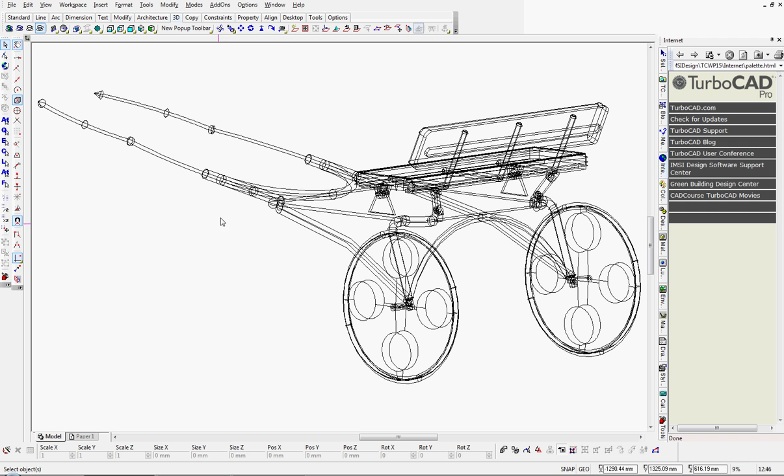We're in Turbocad Professional V15.2, looking at a little racing sulky I designed. The chassis parts are made by sending a profile along a path—in this case just an ordinary circle along a path line I've defined. Let's have a look in hidden line mode.

Today I just wanted to cover a bit about properties and the different looks. I think we'll pop her into a render and see what we've got.

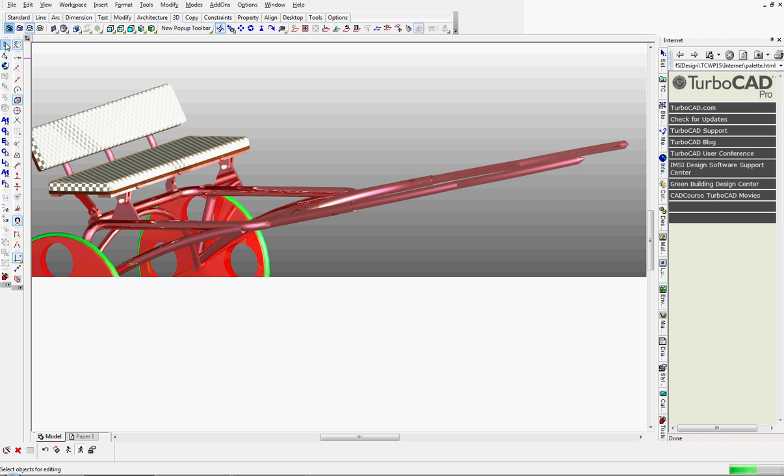I rather like these green rims. It's made out of a torus, that's the tyre, so I'm just going to have a look at its properties under the 3D tab. It's a green plastics—let's see what else we've got down here.

Plain red's no good on the red wheels and red frames. I'm just going to show you an example—white wall tyres are big in America, so we can just change its properties at a glance.

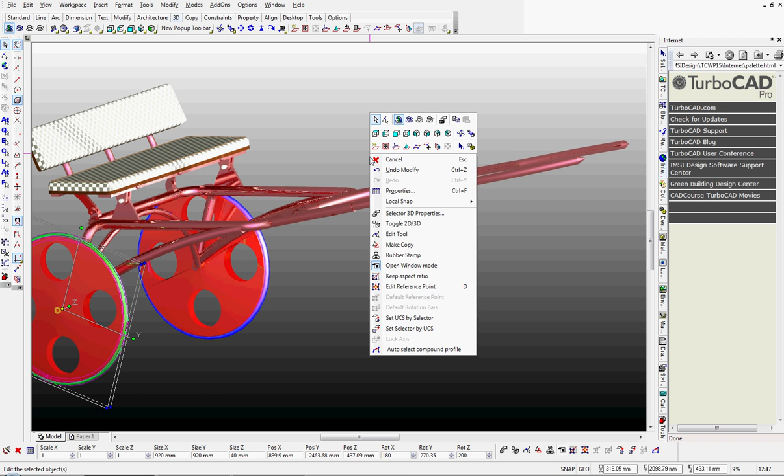A massive amount of options in Turbocad's properties, and I think I like that blue. Another torus—under the properties 3D tab: plastics green, plain red, plain blue.

So there we are, on blue rims. The backboard—that isn't the board, that's the frame that's holding it.

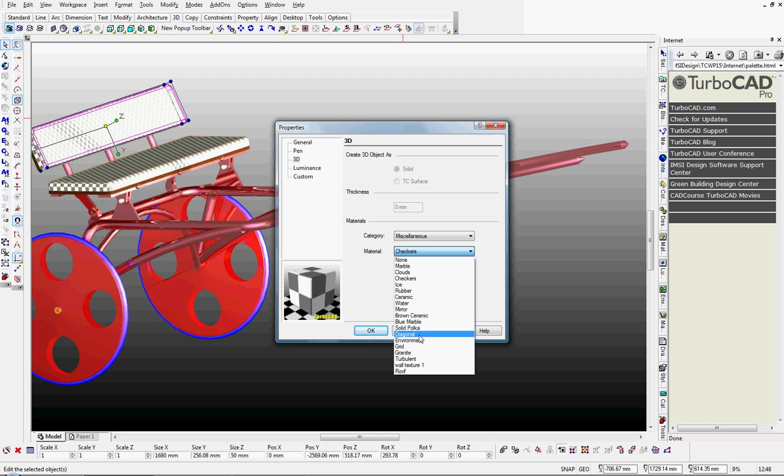Not sure what will happen here because all these corners have been filleted, so: checkers, ceramic, brown ceramic, blue marble, solid polka.

Well, undo that, I don't like the look of that. Let me just pop into the standard toolbar and zoom in on the corner so I can show you what I'm talking about.

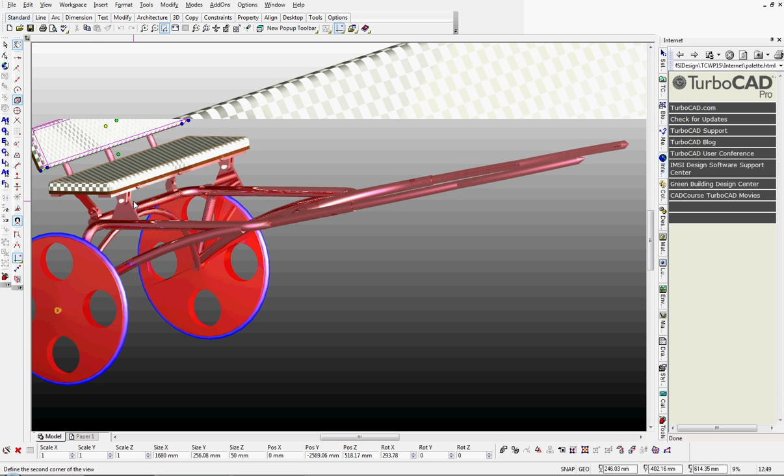Whereas normally the edge would be square, 90 degrees, I've chamfered all these off to give a textile appearance, and sometimes properties can't deal with that because the drawing's been altered so radically—we're at cosmetic stage now. Pop back out.

Something I don't think I've covered much is the open window mode, where we drag this box. It's now selected the two front yokes there, so we just pop into 3D, paint band, red paint.

As I've said before, I'm the world's worst for doing my paints and not saving them. That's an orange, and I'm going to pop a yellow on that.

It probably didn't have hold of that little cone there, so it didn't alter its properties. Back into 3D, paint band, red paint.

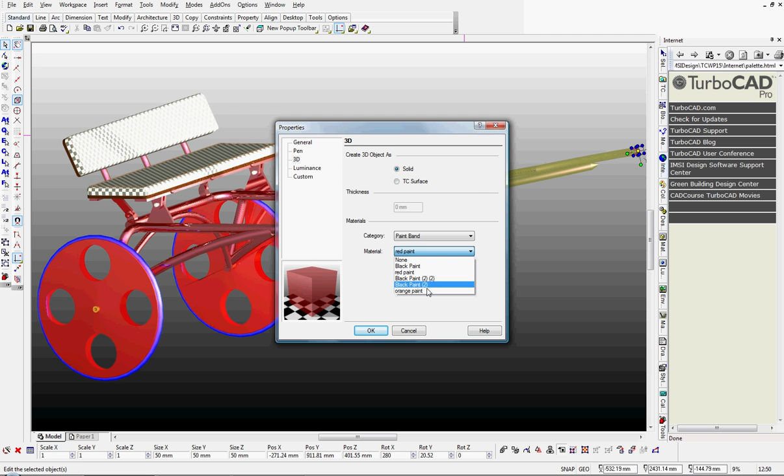Obviously I was using the orange—very bad housekeeping habits of mine. And we see the frames now partially yellow.

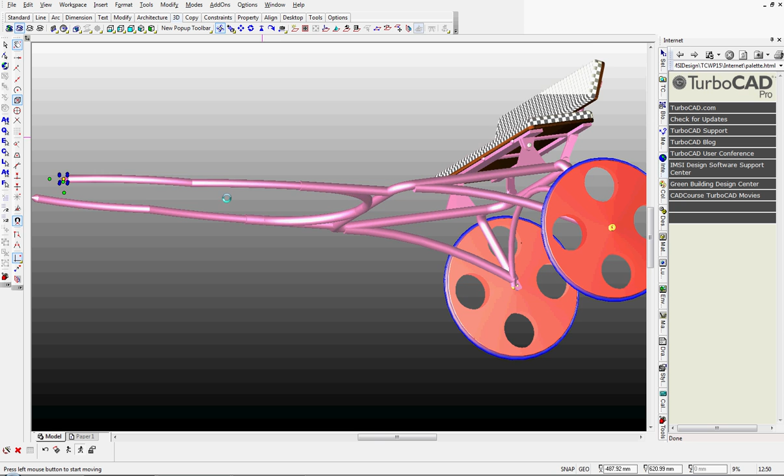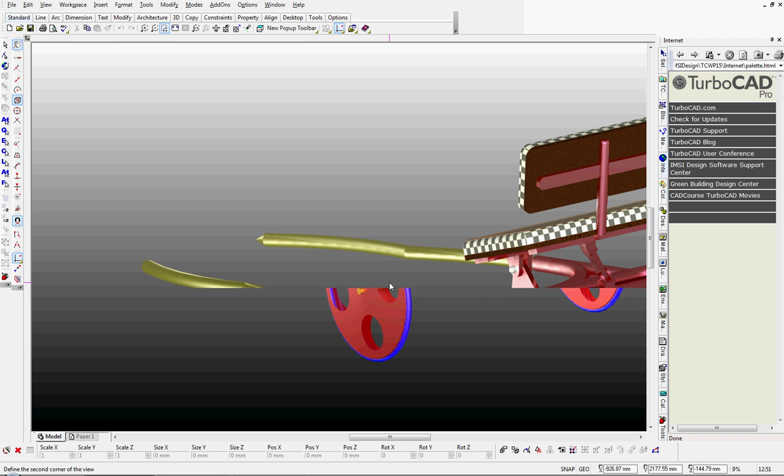I'm just going to grab hold of that, look to the drawing centre here, and go on the standard toolbar so we can see. Not sure what the overall effect of a gold frame would do.

A quick reverse method: undo, modify, undo, modify, undo, modify—and there's our red frame back up. Just pop it into isometric mode.

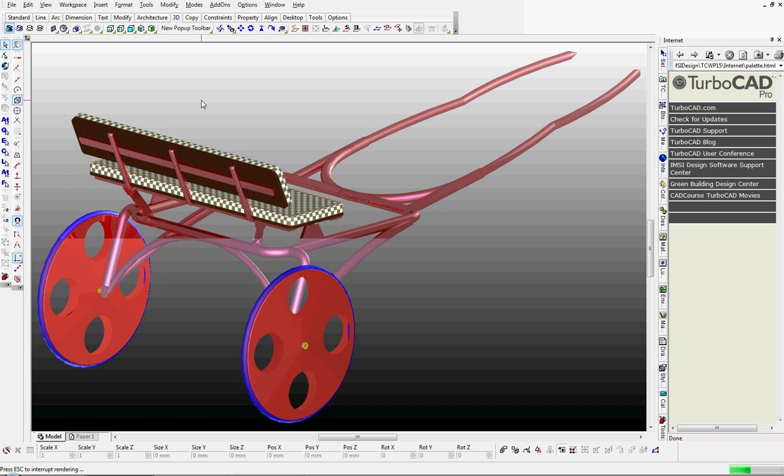A few different views, and it's full photorealistic rendering going on now. Not much else I can show you with that.

We've got one green and one blue—that's because I went back too far undoing.

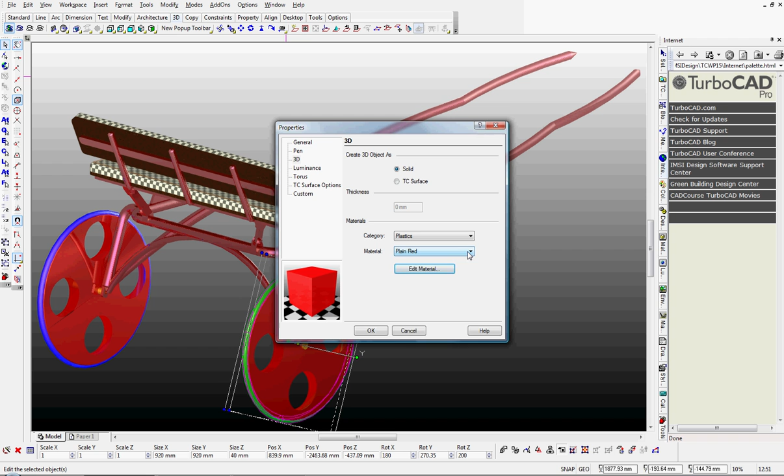Plain red—just cancel that. Plain blue, okay. That's because when I was undoing I went one step too far back.

And some various views, so you can see you can alter the properties to virtually anything you want.

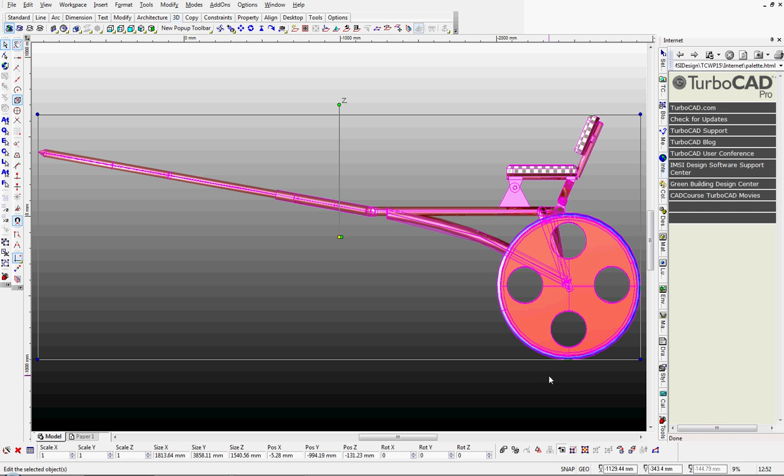There's plastics—this is a checker, like a checker pattern—and we could just open window the whole thing. That will select every part in the drawing, making it all one colour, for instance.

I wondered if—the only thing I hadn't done on this drawing was put some footrests in, until I got some measurements off the jockey.

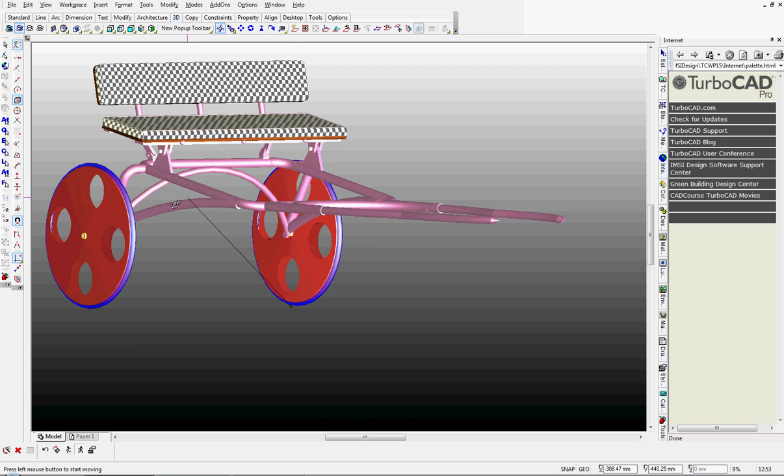So there you have it, properties—virtually any property you want.

I'm just going to pop into properties again, and if I drop this drop-down menu now, you'll see virtually bricks, circuit boards, decoration, eco-friendly, glass, knits, lacquer, leather, metals.

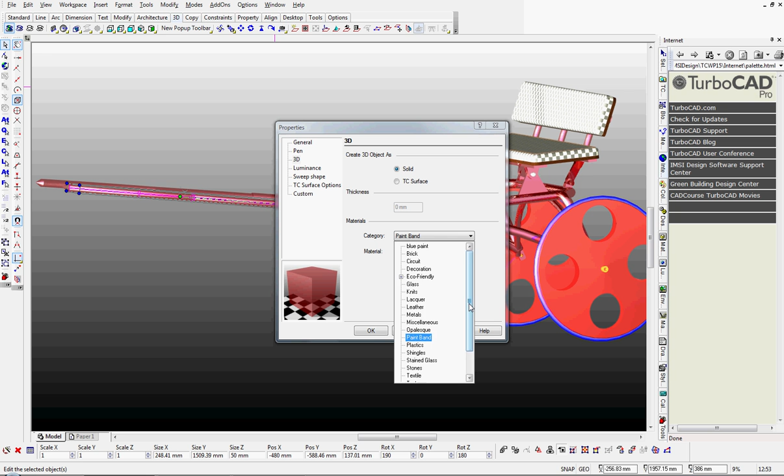And literally, under each subcategory, a thousand different combinations—plank length, plank width, strips. You can change the groove colour there to a dark shade, the actual wood colour, the ring colours—absolutely amazing possibilities.

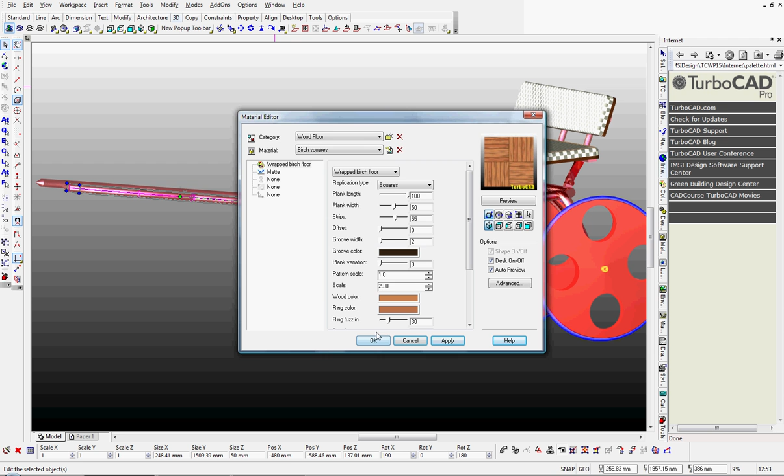It's one of those things you've just got to play around with—properties. There are endless possibilities in there. So that's today's properties.